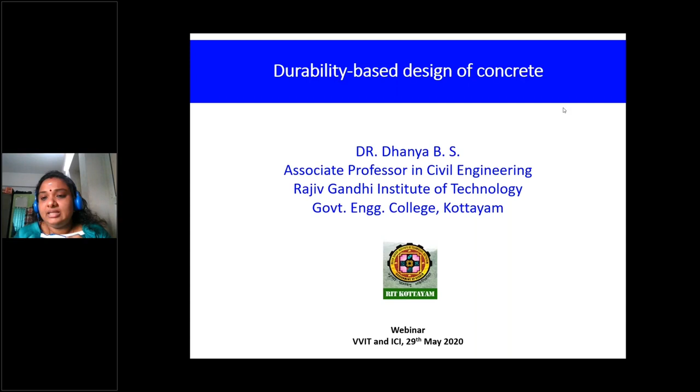Thank you, Divya, for inviting me to this platform for giving a webinar on durability of concrete. And I thank the organizers, the students, the ICI members, and the entire team of VVIT for inviting me to this platform. Today's session is on durability-based design of concrete. As she mentioned, I'm an associate professor in civil engineering at RIT, Government Engineering College, Kottayam, and I've done my research in the area of concrete durability at IIT Madras under the guidance of Professor Manu Santhanam.

So let us move on to today's presentation. Before I start, I want to introduce you to the design concept of concrete durability. Why do you think durability-based design is necessary? Rather, the question is, how do we design concrete these days? Normally we do the design for concrete based on IS 10262, 2019 version, the latest one, where strength is the only concern. We have glimpses of durability-based provisions in IS 456, the code of practice for the design of reinforced concrete, but it's not sufficient. Why do we need to think about durability as a major concern?

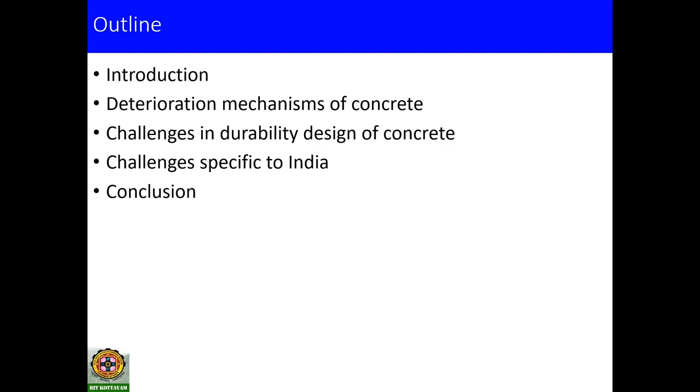That is what I'll be covering in the introduction section, and then we'll discuss the deterioration mechanisms of concrete, followed by the challenges that we are facing now on durability-based design of concrete, and the challenges which are specific to India.

So I think, can everybody mute your mic? I have muted, ma'am. I have muted everyone. You can unmute and speak, ma'am. Okay, fine. Thank you.

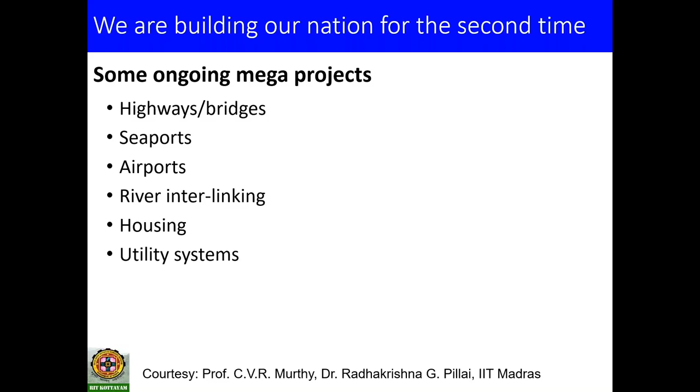So this is why we need to have a durability-based design. Why? Because it is a time when we are building our nation for the second time. A lot of highway projects, bridge projects, seaports, airports, river interlinking, housing, utility systems, all this infrastructure development is happening these days, and we are investing a lot of money for the construction of these mega projects. When we think about an infrastructure project, the major construction material is none other than reinforced concrete. Reinforced concrete has its own advantages, like it can be made from locally available materials. You have studied all this in your BTech classes. A lot of advantages compared to steel structures, and that is why concrete is the most sought-after construction material just below water. We are spending a lot of money on these infrastructure projects, and also because many of our infrastructure and residential projects are getting deteriorated within the service life itself.

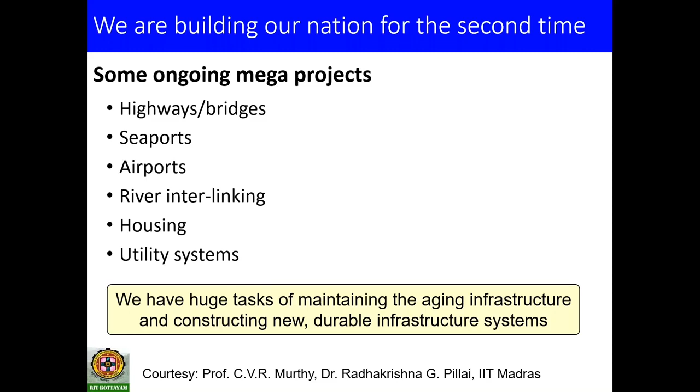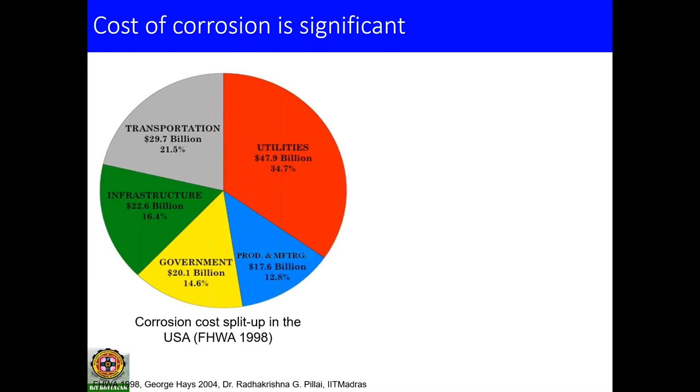We have to spend a lot of money on the maintenance and repair of these projects. So we have a huge task of maintaining the aging infrastructure and constructing new durable infrastructure systems. And this is also very important: the cost of corrosion is significant. This is highlighted because most reinforced concrete deterioration is happening because of the corrosion of steel rebar, which you might have observed in your institute, in your surroundings, in your home itself, a lot of signs of premature corrosion of steel in the rebar.

And this is an estimate. In 2012, the direct cost of corrosion was around 2 lakh crores per year. It's an old estimate. A corrosion protection strategy to minimize the repair and maintenance cost is a must for us.

And what is the traditional definition of concrete durability? That means we have to make our structures, especially the reinforced concrete structures, durable. So then what exactly is meant by durability?

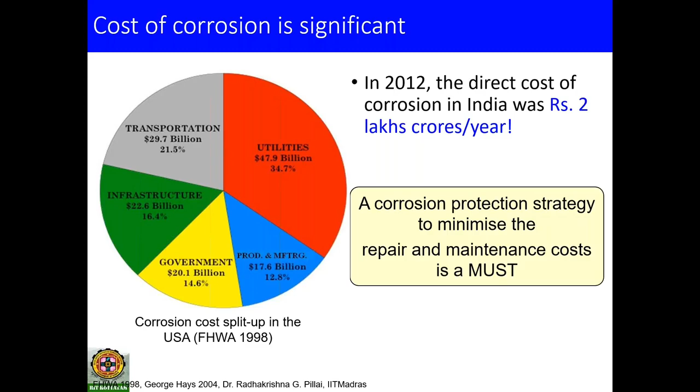Durability is nothing but the resistance against deterioration. The ACI code defines durability of Portland cement concrete as its ability to resist weathering action, chemical attack, abrasion, or any other process of deterioration. So that means the durable concrete will retain its original form, quality, and serviceability when exposed to its environment.

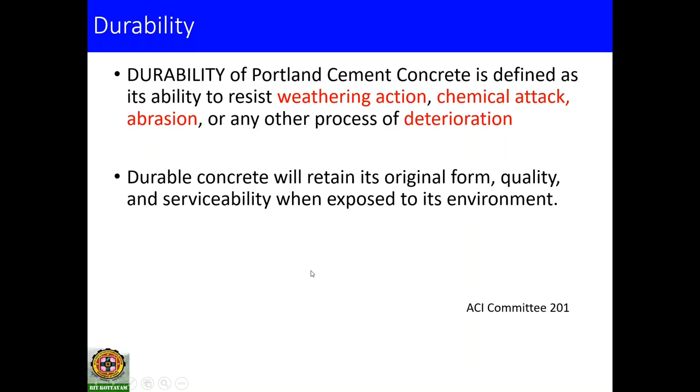When we think about concrete durability, the issues can happen either from the concrete system or from the aggressiveness of the environment. The concrete system involves the materials we have used for construction, for example the binder, like PPC or PSC or ordinary Portland cement, or a combination of OPC and any supplementary cementitious materials like slag, fly ash, silica fume, etc.

How much is the content? What are the mix design parameters that we have adopted? The type of aggregate, the quantity of aggregate, the admixtures, its quantity. So everything coming under the material section.

Hello? Hello? No ma'am, it's hello? Okay ma'am, someone else has spoken. It's okay, okay. I thought you have spoken, some issue with the connection. Okay, no, so that's then okay.

We'll have the process. The process involves mixing, transporting, compaction. So whatever the processes involved in the manufacturing of concrete determines the process part. So the concrete system involves material section and processes.

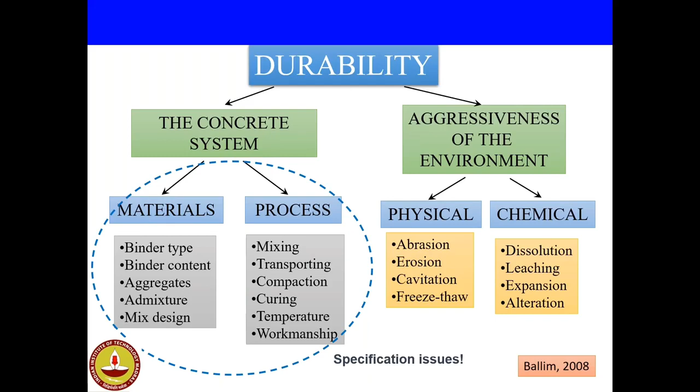And there lies the importance of the specification. Like, how do we specify the concrete? And if you remember your concrete technology classes, how did you do the design of concrete?

You might have designed it for M25 grade or M30, like that. So what does that 25 indicate? It is nothing other than the strength. And normally we don't have much other things, but some inherent or deemed-to-satisfy approach is there, or some tables we have to satisfy based on IS 456, like minimum cement content, minimum or maximum water-cement ratio.

So like that, some conditions are there which are indirectly pointing towards the durability, but our major concern is still the compressive strength, and we are not doing any other test other than compressive strength to check whether the concrete is okay. And by doing this, we assume that the durability and other engineering properties are a function of compressive strength. And this is not correct, which is being proved by research that happened long back.

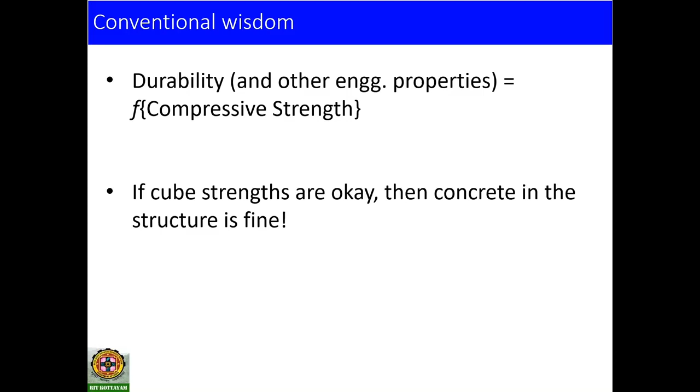So still we are following this myth that durability is a function of compressive strength, or rather we take the approach that if your concrete is placed in an aggressive environment, increase the grade of the concrete, and that will take care of the durability part. And this is not correct.

So that means in order to get a good pore structure, it's not only the material that matters, it is the construction processes as well. If your cover block is not properly placed, you will end up with less cover. If your concrete is not cured properly, what will happen?

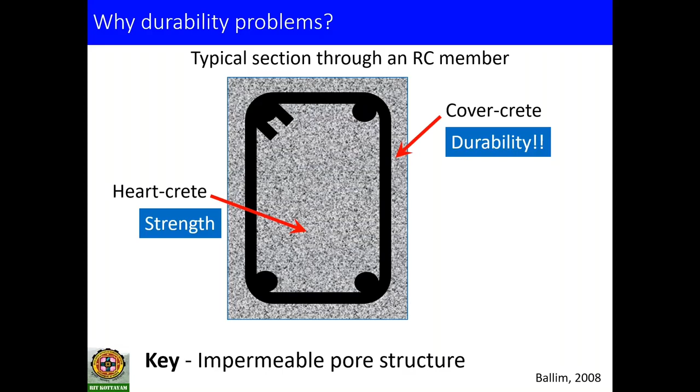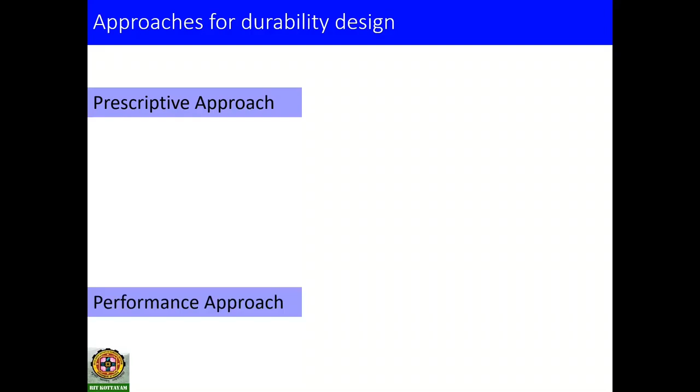Coming to the different approaches of durability design, we have mainly two approaches: prescriptive approach and performance approach. In the prescriptive approach, that itself can be divided into two. One is called the avoidance of deterioration approach. For example, using a coating for the steel reinforcement, so we avoid the contact of the aggressive species with the steel. If you're using stainless steel, there also we are avoiding the type of deterioration. But that method is very costly, and for normal construction application, it's not economical.

That is why another approach, called the deemed to satisfy approach, evolved. In this approach, we put prescriptive requirements on the materials. Prescription means specifying a value - if I use a particular content of cement, say 360 kg per meter cube, and if the water cement ratio is less than say 0.45, my concrete is deemed to be durable in that particular service environment. This is what we do right now. I'll show you table 5 of IS 456, where these prescriptive requirements of the materials are specified. By satisfying these limits, it is assumed that this concrete is durable in that particular service environment, which in many cases are not true.

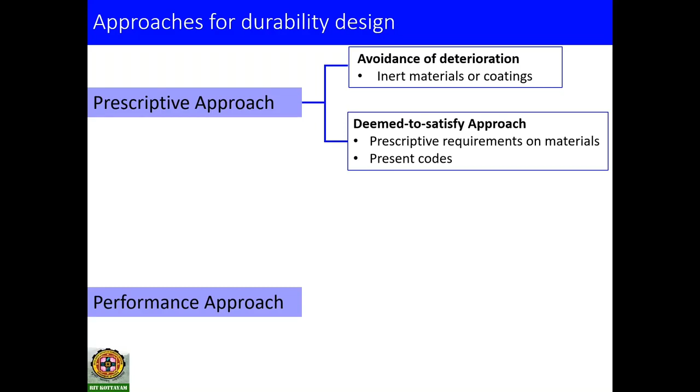So that is why from the prescriptive approach evolved another approach called the performance approach, in which we specify performance-based tests and indicators. Here the performance is specified - performance means what you need at the end in your structure. What is the parameter or property of the concrete required in the structure? Is it crack resistance? Is it compressive strength alone? Is it shrinkage resistance? Is it chloride ion resistance? Whatever it is, that property will be specified. There should be test methods available to test these properties at the structure, and based on these tests, there are a lot of things like pre-qualification and all.

So we are doing the design of concrete not only for the strength, but also for certain durability parameters, which are indicative of the performance of the concrete when it is exposed to its actual exposure condition or actual service environment. Based on that, the quality rankings are given. So that is the first approach.

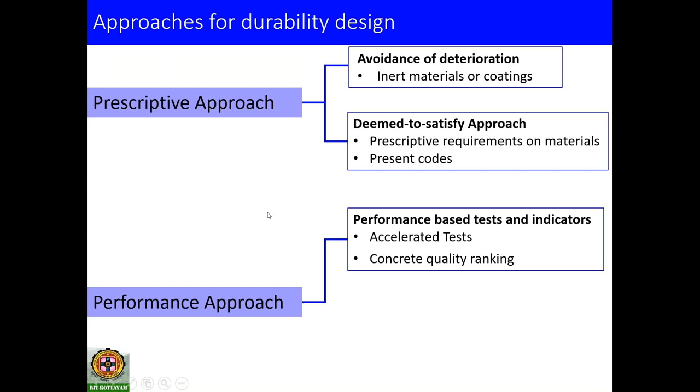This is very rigorous and needs a lot of data, and these service life prediction models are to be developed for that. It is there elsewhere in the world, but in India it's still in the primitive stage. It's not that the engineers are not capable of doing that, but these things are to be validated with real field data - that is what is missing in our case. So we are in the stage of moving from the first stage of the performance approach to the second rigorous method. What I have shown here is that even though IS 456 is in the deemed to satisfy approach, all over the world this has moved to the performance approach, and slowly we are moving from the deemed to satisfy approach to the performance-based tests and indicators.

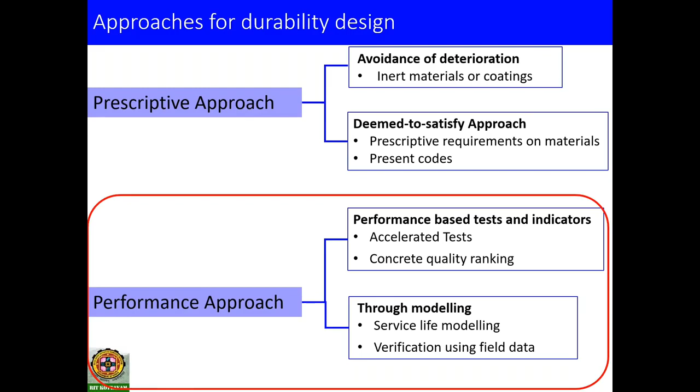So this is exactly what performance specification is. It gives instructions that outline the functional requirement of the hardened concrete depending upon its application. If the same grade of concrete, say M45 grade, is going to the interior column of a building, its performance can be strength and weight alone. Whereas the same concrete, if it goes to the construction of a bridge deck, there it's not only the compressive strength that matters, but also the chloride resistance or the carbon dioxide penetration resistance. So all these matter - it again depends upon its final application. The end use is what matters - that is the crux of the performance-based specification.

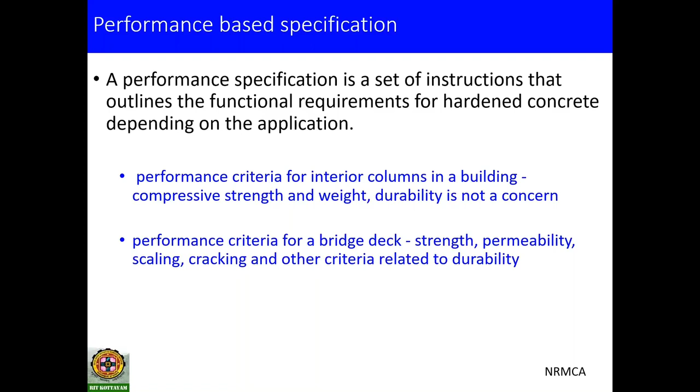Now, once we think about the performance-based design or the durability-based design of concrete, it's not only the strength that matters, the durability also matters. So these are the challenges that we have to overcome.

First, we should have a clear understanding of the deterioration mechanisms. So I have listed out 5 points, and now we are going to see in detail these 5 points. So that is the agenda of today.

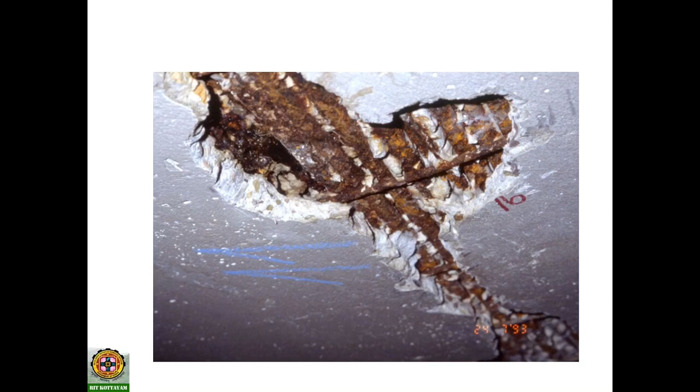So first one is understanding the deterioration and transport mechanisms for the various exposure conditions. So can any of the BTech students unmute and tell what is this mechanism? What is displayed on the screen?

It's a durability issue of concrete, or rather reinforced concrete. Can anybody tell what is this? Can anybody tell what is displayed on the screen? Corrosion, ma'am. Yeah, it's none other than corrosion.

Now, because of the corrosion, the cover on the concrete has spalled off. So we have different stages of corrosion. You can see some white patches, then brown patches coming out of that, and then some hairline cracks, then the spalling of concrete. So different stages of corrosion are there.

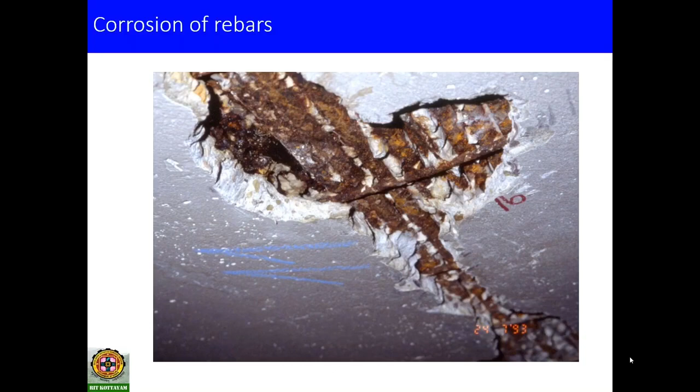So good that it is the corrosion of the steel rebar.

Now, why is corrosion happening? It's an electrochemical reaction, and for an electrochemical reaction to happen, there are 4 essential parts required: one is the anode, second is the cathode, and then you need an electronic conductor, and you also need an ionic conductor. In a reinforced concrete system, the anode, cathode, and the electronic conductor is the steel rebar or the metal itself, whereas the ionic conductor is the pore water, the water present inside the pores of the concrete.

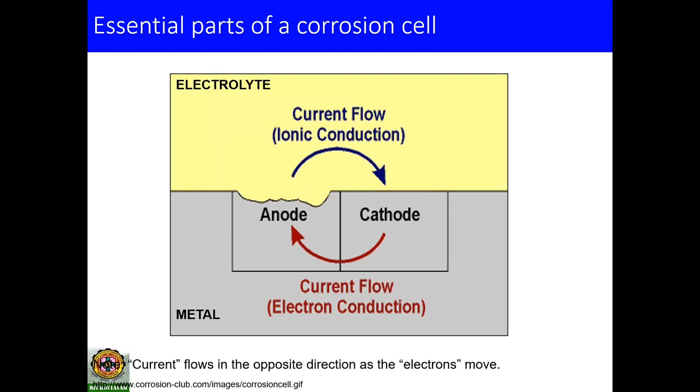You know that concrete is not a perfect solid. The HCP, or the hydrated cement paste, is having a lot of pores like capillary pores, gel pores, etc. And these pores have water, which we already gave for the mixing. All the water might not have been used, and that water is not pure water, it is having a lot of ions in it. We call that the pore solution, and that pore solution is the ionic conductor.

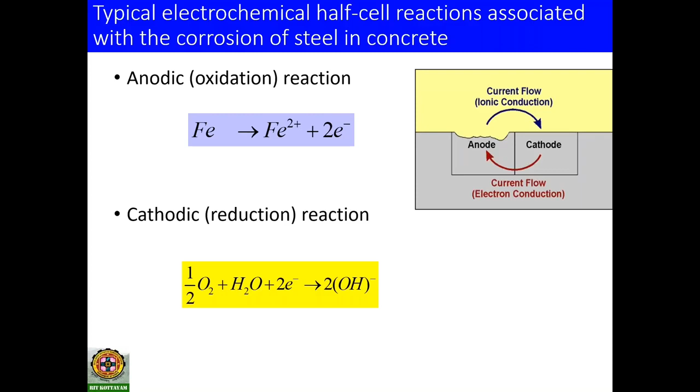And in the corrosion, we'll have the anodic reaction happening. At the anode, oxidation happens, iron gets converted into Fe2+, and at the cathode, the reduction reaction happens and the OH minus ions are released.

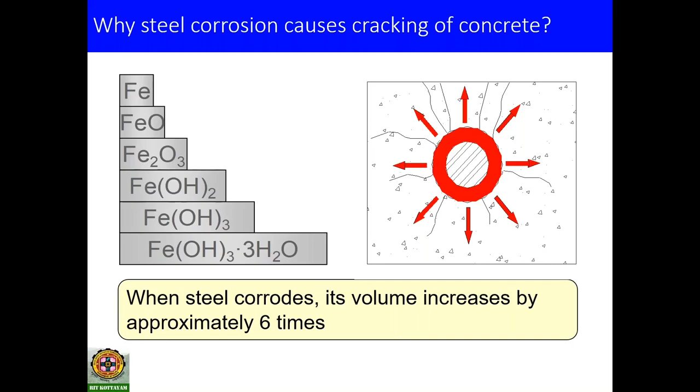So that is what is happening in the corrosion. My professor always says that when you take 1 cup of steel, you will get approximately 6 cups of the corrosion product, or the iron oxide. This is the major reason you see the spalling of the concrete, because it does not have much space to sit, it exerts pressure on the cover concrete and it gets spalled off.

And there are 2 major types of corrosion in reinforced concrete structures: one is called carbonation induced corrosion, and the second one is called chloride induced corrosion. When we place a rebar in a highly alkaline system like the cement matrix, it will form a passive film around the steel rebar. Whenever this passive film breaks, or we call it depassivation, corrosion starts.

So for depassivation to happen, we need certain conditions. One is, if the alkalinity is lost, that is a favorable condition for depassivation to happen. So that is what is happening in the carbonation induced environment. In the carbonation reaction, the atmospheric carbon dioxide will enter into the concrete.

It reacts with the calcium hydroxide, which is a cement reaction product, in presence of water, forming calcium carbonate. Because the calcium hydroxide is getting converted into calcium carbonate, the pH gets reduced, or rather the alkalinity is lost. When the alkalinity is lost, we have a favorable condition for depassivation of the steel rebar. And the carbonation induced corrosion is a general or uniform section loss, meaning uniformly you can see the corrosion happening to the steel rebar, and the section loss will be uniform.

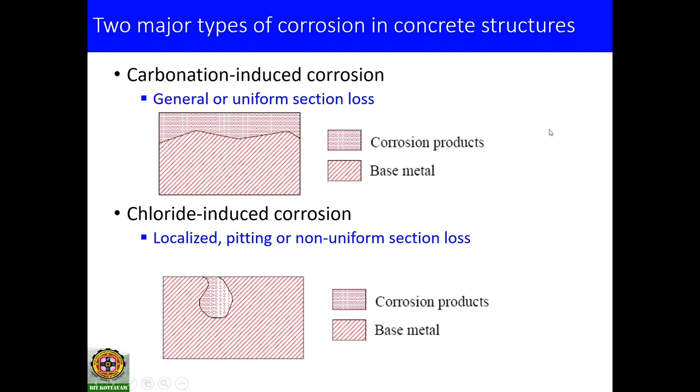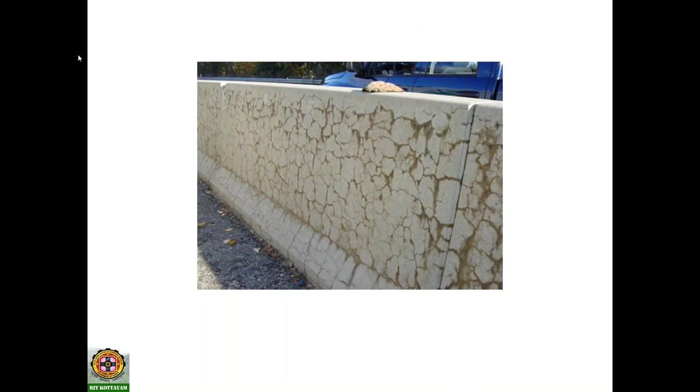Now can anybody tell what is shown here? This is another deterioration mechanism of concrete, with a signature cracking pattern. Is it temperature cracks? No. Water crack? No. Shrinkage crack? No. This alligator crack pattern - is it because of algae, or freezing and thawing? No, it is actually the alkali aggregate reaction.

This typical map-like pattern is the signature cracking pattern of the alkali aggregate reaction. If we use aggregates having reactive silica, like opal or chalcedony type minerals, it can react with the alkalis present in the cement, forming a gel-like compound, and this gel can absorb moisture from outside. Because of that, it becomes expansive in nature, similar to what happens in steel corrosion. Volume expansion happens and it can crack. So that is what happens in the alkali aggregate reaction.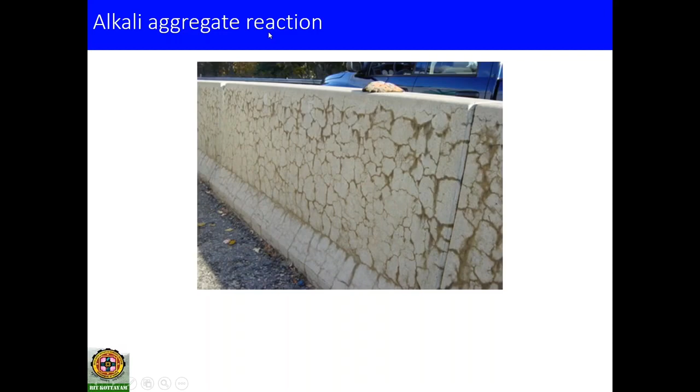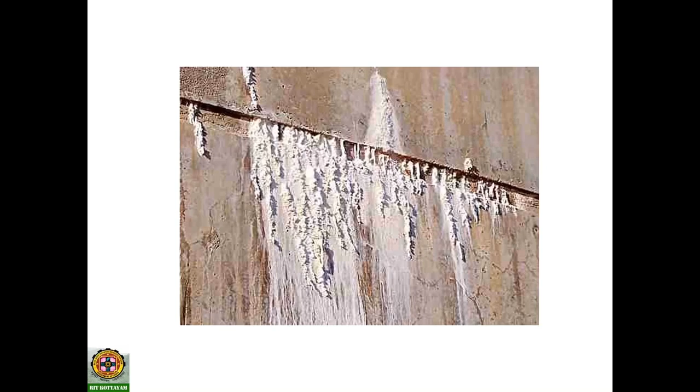Now these white patches, what does this indicate? Efflorescence. Yeah, efflorescence, right, good. Or it's leaching.

How does leaching happen? It's because when soft acidic water, or even normal water, enters into the concrete and comes out, it can dissolve the calcium hydroxide. When the calcium hydroxide comes out, it reacts with the carbon dioxide, forming calcium carbonate, and this calcium carbonate is what is shown as the white patches. So this is again a type of deterioration of concrete.

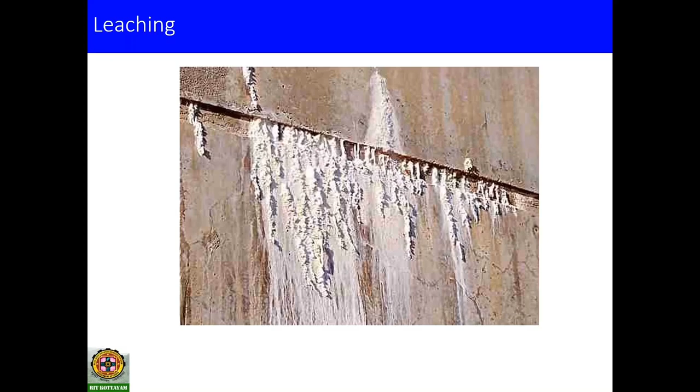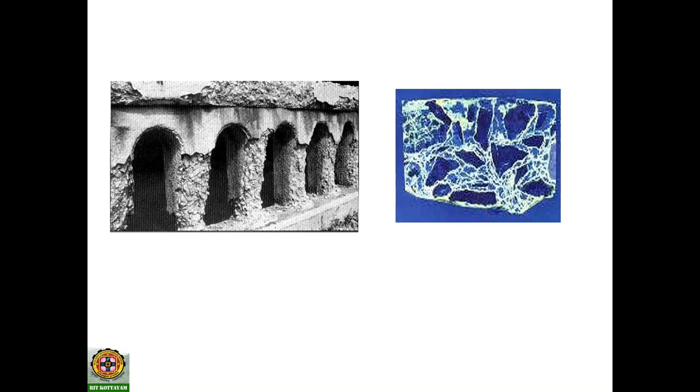Now this picture, what is this? Seawater attack? No, it's freeze and thaw attack. That means in cold countries, water can enter into the concrete and it can freeze.

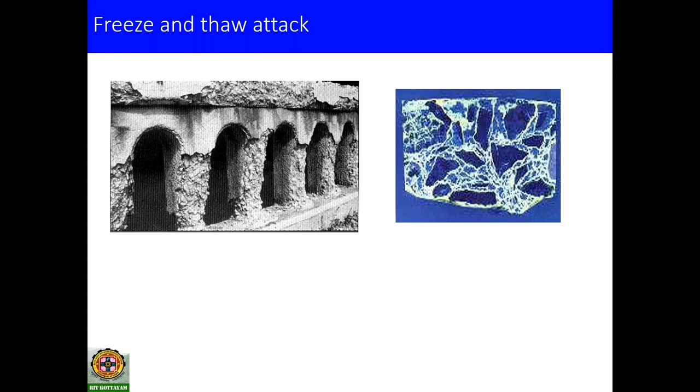The water inside the large pores will freeze, and because of that, water from the smaller pores will move to the larger ones. Because of this movement, dilation happens, or stresses are induced, and it can lead to cracking. Also, when ice forms, it is again a volume expansion process, and because of all this, it can deteriorate the concrete. The solution for this is nothing but air entrained concrete, where we provide space for the ice to freeze so that this pressure can be reduced.

Now this one is the sulfate attack, in which sulfate from the exterior environment enters into the concrete system. It reacts with the C3A, finally forming ettringite at a later age. This ettringite formation, or delayed ettringite formation, is again a volume expansive process which can deteriorate the matrix and cause cracking.

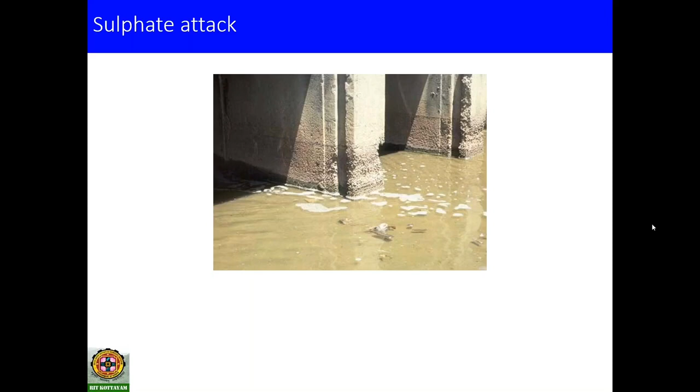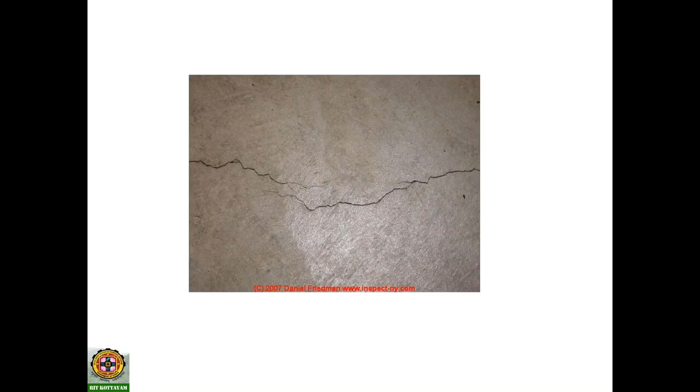So that is yet another deterioration mechanism of concrete. And this type of crack, somebody has already answered, is cracking due to shrinkage. We have different types of shrinkage: drying shrinkage, plastic shrinkage, and so on. So this is a typical shrinkage cracking of concrete pavement.

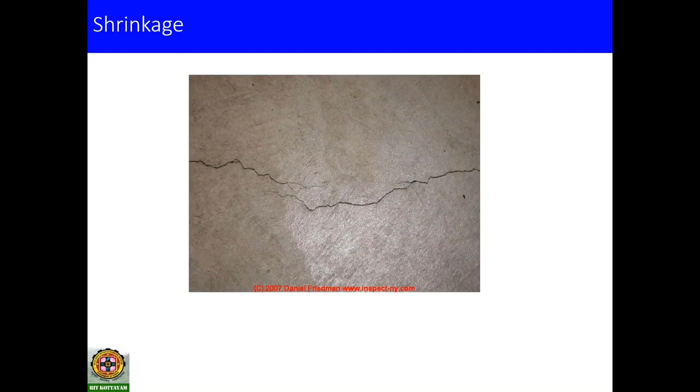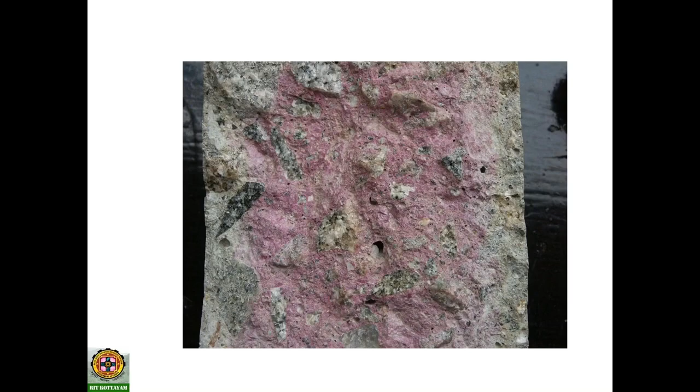And this indicates the pink color. So that means the phenolphthalein indicator is sprayed onto this. This is the typical test for carbonation, where you can see at the outer edge it is colorless, whereas the inner chunk is pink in color. That means from here to this level, the carbon dioxide had penetrated and reacted with the calcium hydroxide, forming calcium carbonate. Because of the consumption of the calcium hydroxide, the alkalinity is lost, and that is why you see a colorless portion here. Here, the calcium hydroxide is still remaining, and you can see a pink color.

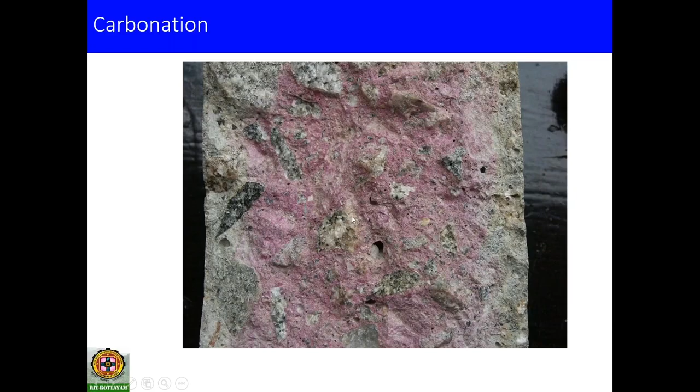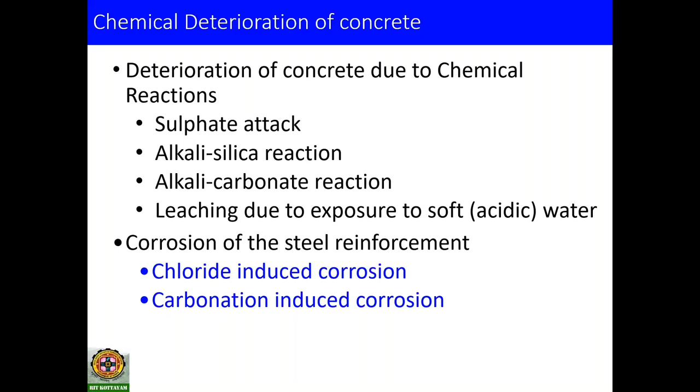So I just want to show you some pictures of that. In different ways we can categorize the deterioration of concrete as chemical deterioration, physical deterioration, and so on. So this is a compilation of the different chemical deterioration of concrete, and why these things are happening, especially the chemical deterioration.

It is because we know that for sulfate attack to happen, it needs the presence of sulfate ions, SO4 ions, and water is required. For steel reinforcement corrosion to happen, it needs the presence of either chloride ions or carbon dioxide, along with oxygen and moisture. And for the alkali aggregate reaction to happen, it needs the presence of moisture.

So that means we need the aggressive species to enter into the concrete system from the exterior environment. Yet another case is there when we provide these aggressive things inside the system itself, suppose we use sea sand for construction or certain admixtures having a lot of chlorides in that. In that case, the scenario is different, where the issue is happening from the concrete system itself.

But I am focusing on a condition where the materials, everything is fine, but the deterioration is happening from the outside. And for that, we need the presence or the movement of the aggressive species from the exterior environment to the interior of the concrete.

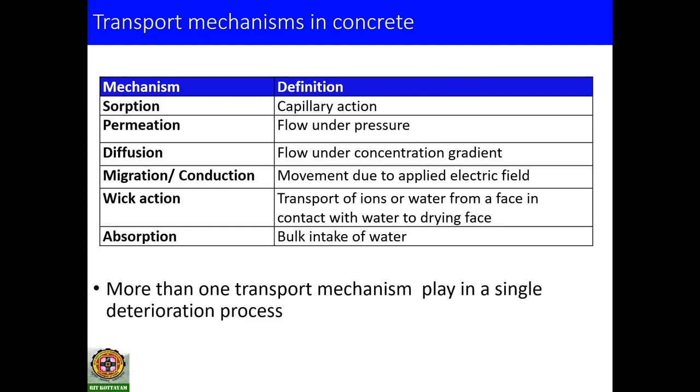So the next challenge is the development of a suitable exposure classification system. This is the exposure classification system present in the current IS 456, where it is mild, moderate, severe, very severe and extreme. We have discussed a lot of deterioration mechanisms, but it's not getting reflected here. It's a generalized classification system.

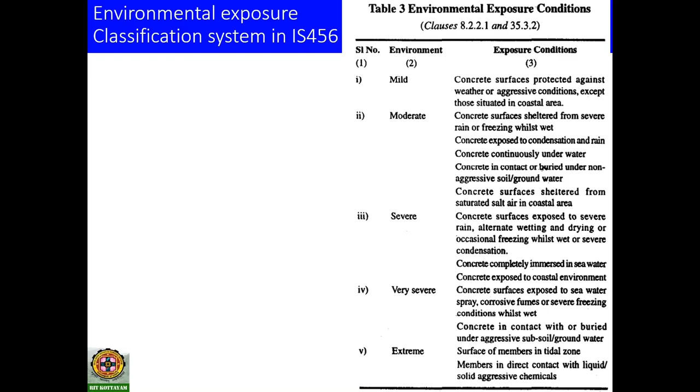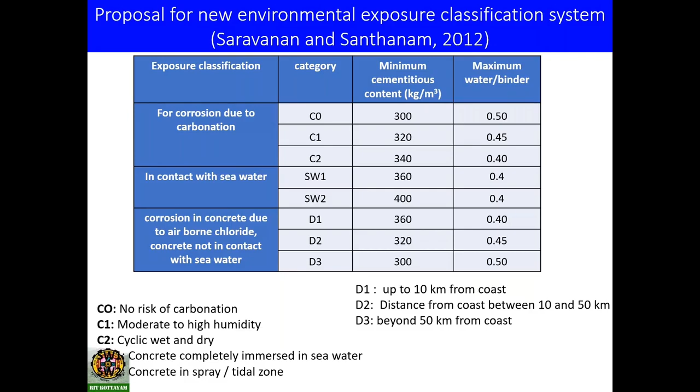What we need is a more specific one, and there are many proposals in front of BIS to include this. Already the European codes, the BS codes, everything have moved to a deterioration specific environmental exposure classification system, and this is a proposal in front of IS 456 from my professor on the environmental exposure classification system. I hope in the recent revision this will get incorporated, or a modified version of this kind of deterioration specific environmental exposure classification system will be getting incorporated into IS 456. So we don't have to worry much now on this aspect, but this is a challenge.

Next, we should have suitable durability parameters and also test methods to assess the service life. Many of these durability issues are reflecting on the structure after a few years, say 10 years or 15 years, which we call premature, because it might have been designed for 100 years of service life. When the deterioration signs are happening at an early age of 10 years, it is not acceptable.

But still, we have to wait for years to see the issues of concrete deterioration. We cannot wait that much time to give the payment and all. So there should be test methods available, or rather we need accelerated test methods which give us quick and reliable data at early stages itself.

Hello. Hello, yes ma'am, it's muted ma'am. You can continue. Okay. Now I thought he is asking some questions to me, that's why I stopped. Yeah.

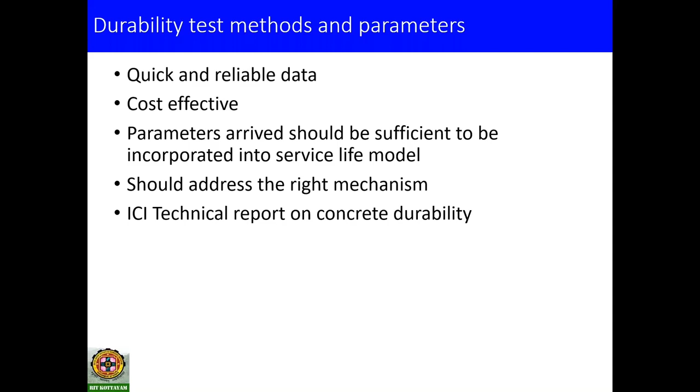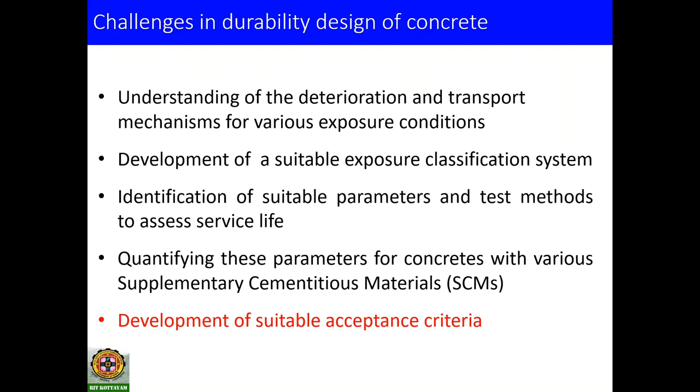Next, having developed all these, we should develop the acceptance criteria for the durability parameters. What do you mean by acceptance criteria? We have the acceptance criteria available for strength—we design concrete for FCK plus 1.65 into S, whereas in the field we check whether it satisfies FCK plus 0.825 into S. That condition is there in IS 456.

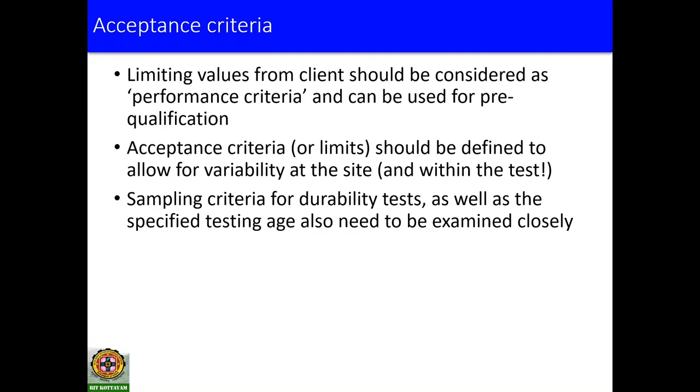Similarly, we should develop acceptance criteria for durability parameters as well, so it can take into consideration the variability between laboratory conditions and site conditions. These durability tests have a lot of variability because it's not a common test—trained people are less available. Because of all this, we have a lot of variability happening, and in that direction ICI had taken a lot of initiative. A round robin test had already taken place to assess the variability of different durability parameters, and this is again a challenge in front of us, so I'm not going into detail about that.

Next, with all these things, the major challenge that we face is on achieving proper durability on structure.

In India, everybody knows concreting, so people used to say, what is there to research in concrete? After all, it is cement, water and aggregate mixed together. But a lot of things are there to do, that's why we are here in this platform. A lot of things are to be conveyed or taught in this area.

This is the most consumed construction material, yet it is handled by unskilled laborers who are not trained, and the level of mechanization is less here. Obviously, many don't know about the science of concrete. For example, if the concrete is not workable, people simply add water.

The water is designed. We do pakka mix design, take this measurement chart, this much amount of water, do the mix design properly in the lab, and then once it goes to the site, many times if the workability is not sufficient, the laborer is the one who decides how much quantity of water to put. So uncontrolled addition of water is one major issue. Curing is not given importance. If compaction is not good and curing is not proper, the quality will decrease. So this is a perfect recipe for poor quality concrete at site.

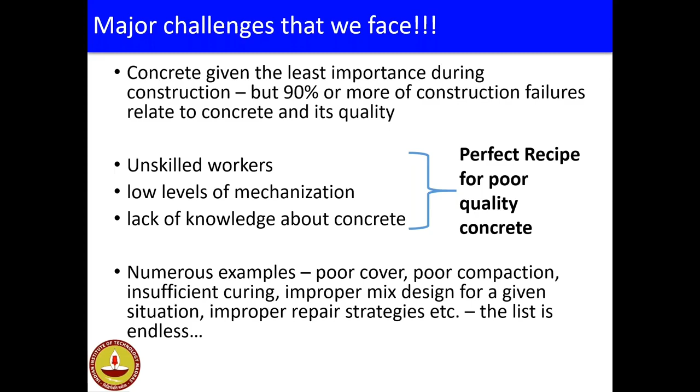Now, what is the way forward? We should have model guidelines and specifications for construction projects in India regarding concrete durability. It's good that during this lockdown period, a lot of discussions happened, and some public sector organizations have come up to experiment with performance-based specification. We are also drafting model specifications for some major construction projects in India, incorporating strength and durability, along with the exposure classes we already discussed.

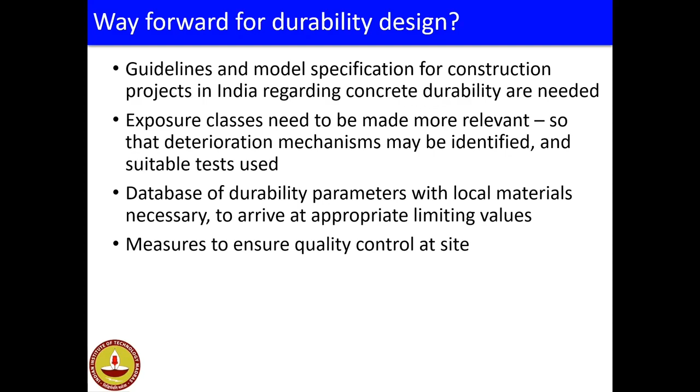We need a deterioration-specific environmental system, and a database of durability parameters with local materials so we can arrive at appropriate limiting values. In India, such a database is lacking, which is why we are way behind in developing service life prediction models. We can develop the model, no issues, but it needs to be validated, so we need a proper database. When a particular mix goes into a structure, many times we get structural drawings, but concrete mix parameters are less available. So that is what we need, along with measures to ensure quality control at site.

Now, for the BTECs especially, I would like to show three or four more slides to improve the quality of concrete, and I believe that should be the major takeaway from this lecture. Whenever you're at a site, please try to follow these points on how to improve the quality of concrete. Please remember this picture.

Good quality heartcrete will give you good strength, but it will not give you good durable concrete. So what we need is good quality heartcrete as well as good quality covercrete. Covercrete with low penetrability or permeability is essential to achieve durability. This is one takeaway for the BTECs: good quality heartcrete as well as good quality covercrete.

In order to achieve good quality covercrete, what do you need? You should have proper construction practices, use supplementary cementitious materials, do proper mix design, do enough compaction, provide cover blocks, and provide good curing for the concrete.

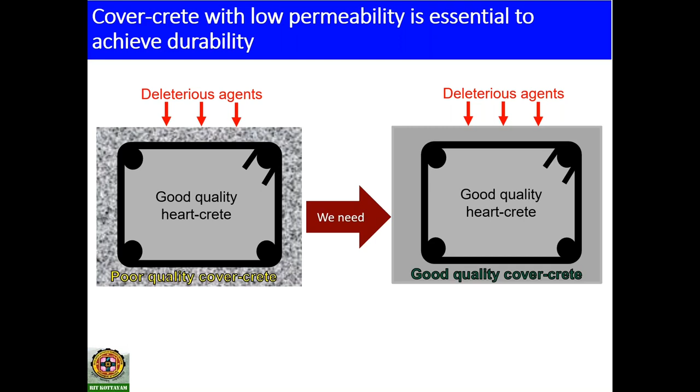Controlled addition of water is essential to ensure sufficient strength and durability. When the water cement ratio is low, we end up with a less permeable or less porous microstructure. If the water cement ratio is more, you end up with a more porous system, and if these pores are connected, it is a free way for deleterious agents to enter into your system. So you should have control over addition of water.

So what will happen if the workability is less? What should you do? You should use chemical admixtures. Don't increase the water cement ratio; rather, use a good chemical admixture.

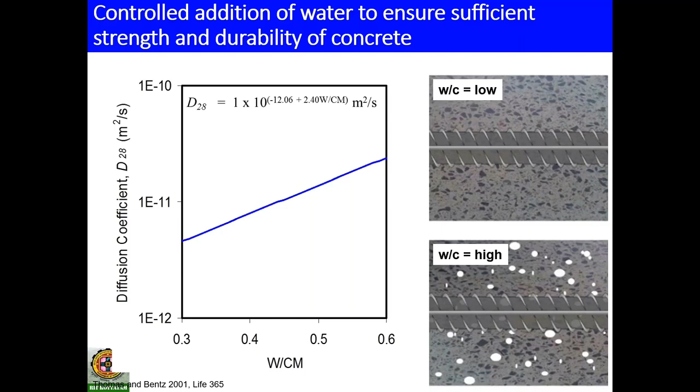Supplementary cementitious materials can improve both strength and durability, as we already discussed. These materials have reactive silica, so the secondary or pozzolanic reaction ends up producing more CSH, and because of the production of more CSH, we get more strength as well as a less permeable system developed.

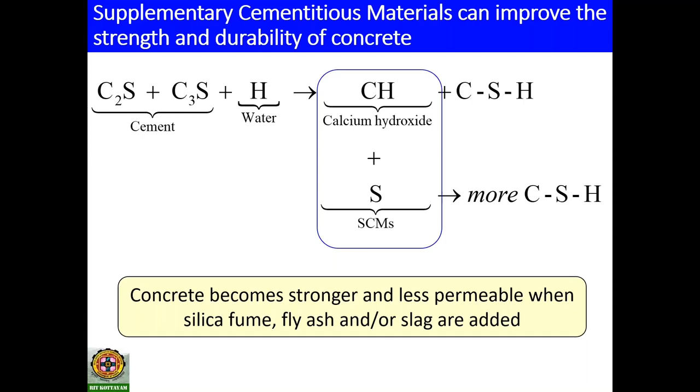This is again very, very important. Curing is very, very important. You know that 28 days of curing is essential in many cases, but it's not practically possible. Use at least 7 days of good curing. What is curing? Curing is you have to retain the water inside that.

So even if you have a delay in providing water curing, wrap it with an impermeable membrane. These are the small things which any practicing engineer can do. Wet it with water and wrap it with an impervious membrane so that the water is held inside. Start curing as early as possible. Ensure more number of days of curing.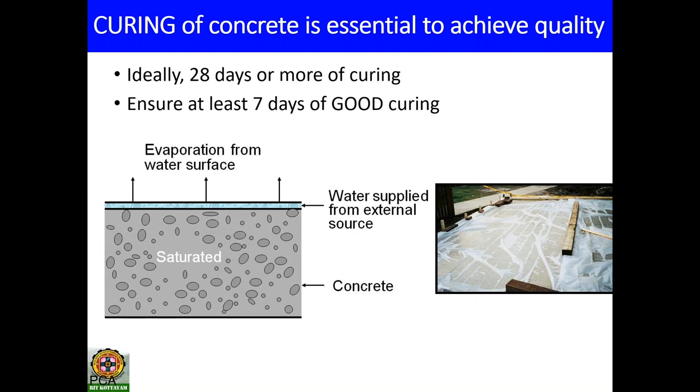When supplementary cementitious materials are used, you have to ensure more days of curing compared to OPC. So these are some of the tips that you should follow so that our aim is to achieve good, durable concrete systems. And this is an evidence for the increase in the compressive strength when moist curing is applied.

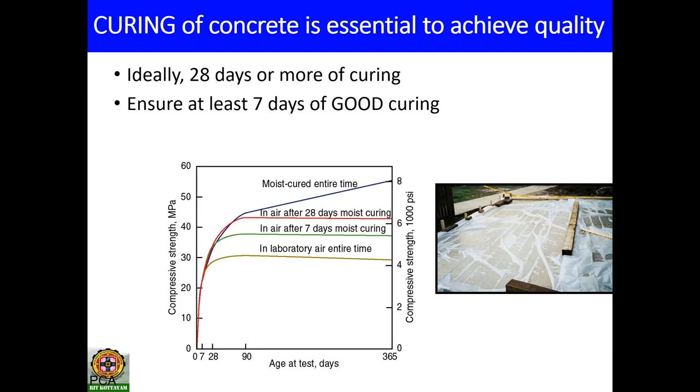And to conclude, I think I'm on time. It's 4 o'clock.

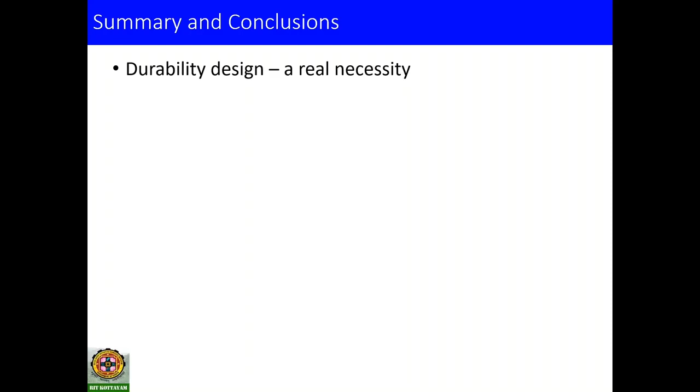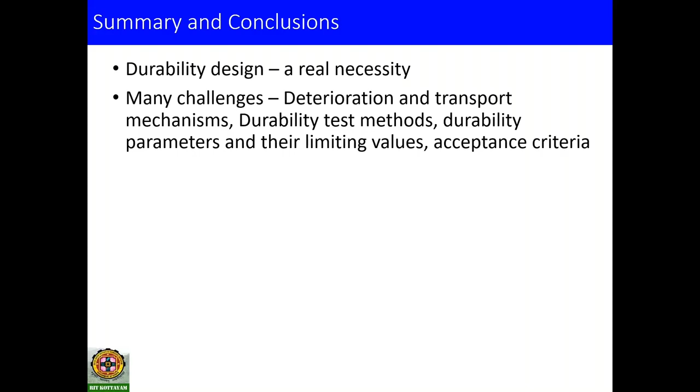The durability design is a real necessity. We have also seen the challenges in front of us when we think about durability based design. We have discussed in detail about all these. We need guidelines and model specifications. We also need a database of durability parameters with locally available materials so that we can have our own service life prediction models.

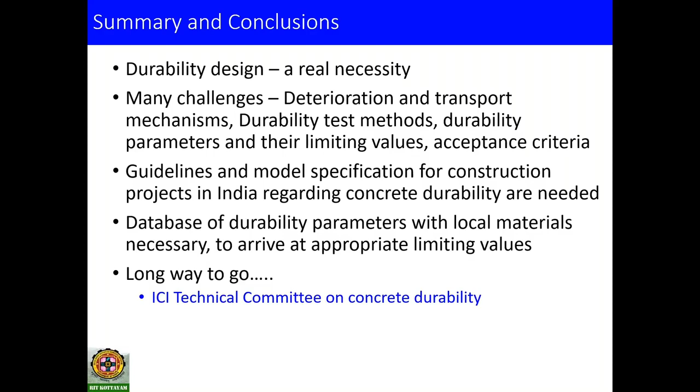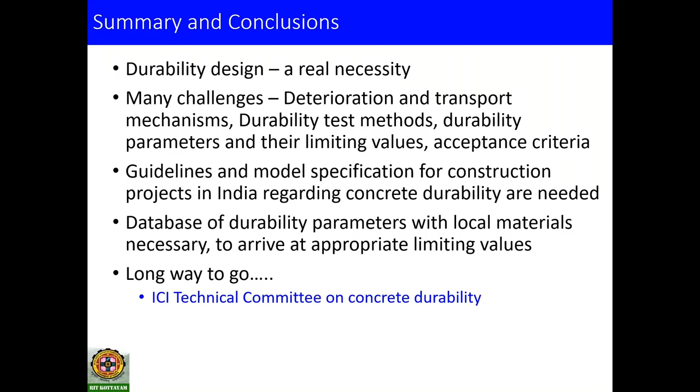In this direction, ICI had taken a lot of initiatives, and one of that is the ICI Technical Committee on Concrete Durability, which ended up in the ICI handbook. It has already given recommendations to the BIS. A lot of workshops and dissemination workshops are happening on the platform of ICI and other ones, so that this knowledge is disseminated.

And in this direction, I acknowledge my professors, Professor Manu Santhanam, Professor Gettu, Professor Pillai, and Professor Matthews of IIT Madras, the BTCM division, for making me a person to present about concrete durability in front of an audience like you people.

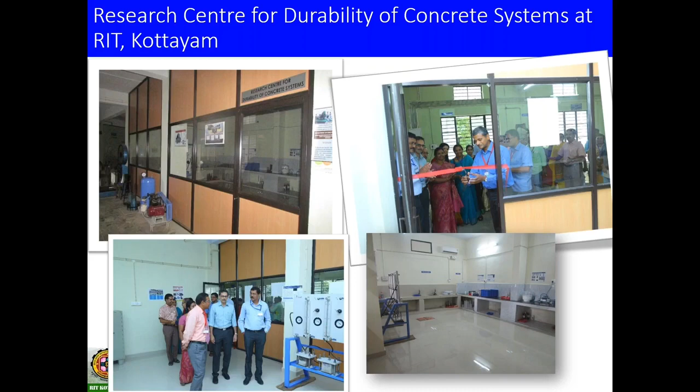And this is the research center for concrete durability at RIT Kottayam, where I have set up most of the durability testing facilities.

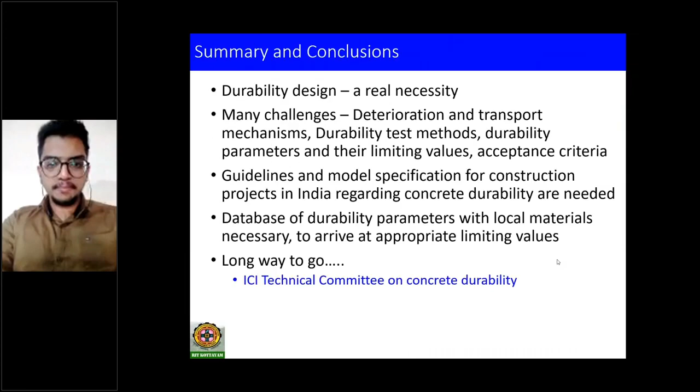Okay ma'am. What will happen if the water cement ratio is more in concrete? How does it affect it? If the water cement ratio is more, the microstructure developed will have more porosity. If the structure is more porous in nature, it will adversely affect the strength as well as durability. Ideally we should have enough water to complete hydration, that is sufficient. Normally it is said that a 0.24 water cement ratio is sufficient for hydration - not all water is used for hydration.

Another question, but we should have enough water, why? Hello, can you hear ma'am? Hello. Hello ma'am, Dhanya ma'am, can you hear? Was the answer audible? No ma'am, it was not audible.

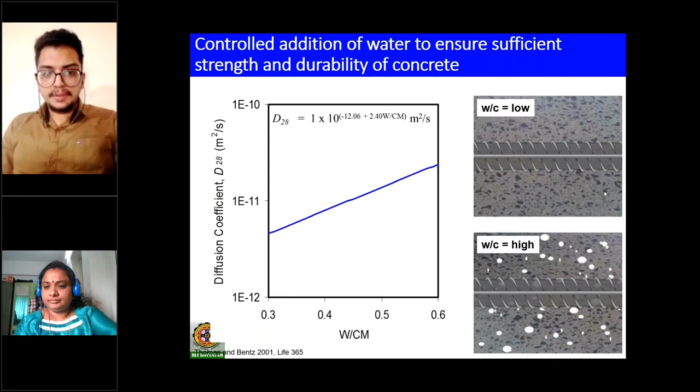Can you make your video on, ma'am? You want me to turn on the video? Yeah, can you see me? Okay ma'am, yes. Thank you, Dhanya ma'am. Okay, bye bye.